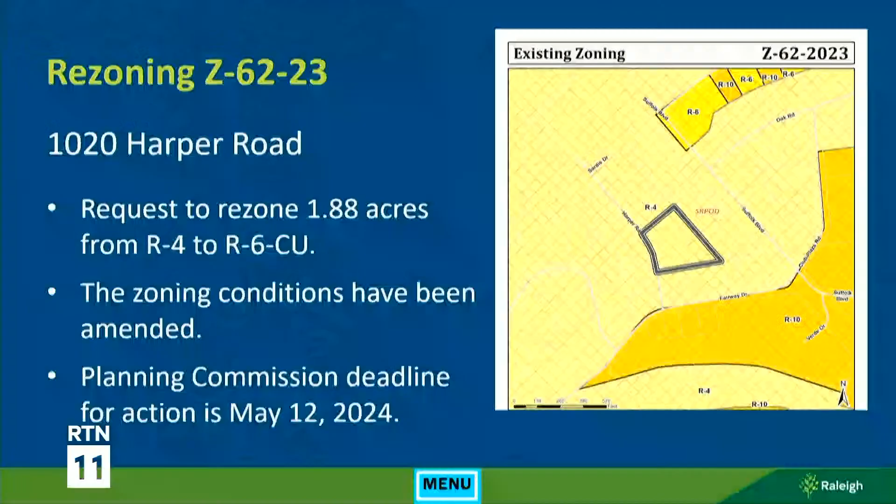So I can outline what those changes are. They include an amendment to Condition 1 to reduce the maximum number of principal dwelling units from 18 to 16, and the addition of 2 new zoning conditions. One pertains to parking, requiring at least 2 on-site parking spaces per principal dwelling unit on the site. The third pertains to side lot setbacks, naming properties on the northwest and southeast side that principal dwelling units would be set back at least 10 feet from. So those changes affect the maximum units and the setbacks that would apply to the site.

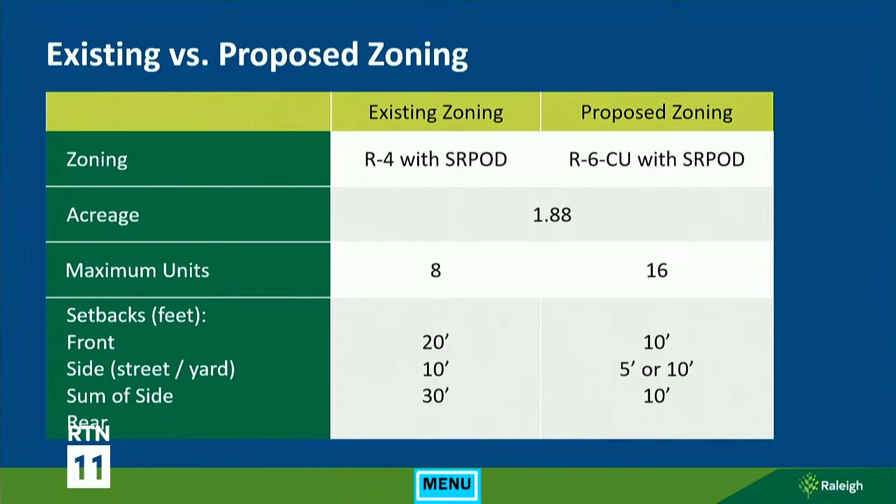And then just as a reminder, this request is consistent with the future land use map, consistent overall with the comprehensive plan, and that includes this list of policies. There were no inconsistent policies that were identified, and your deadline for action does fall before your next regularly scheduled meeting.

So you need to either take action on this case today or request an extension of review. Thank you very much. We have already received public comment on this case, but just so I can get a sense by show of hands, is there anyone today who wishes to speak on any of the proposed changes or any other aspects of this case? And seeing none, we can bring it back to the table for comments from the commission.

Any additional thoughts from our commissioners? And seeing none, I'd like to entertain a motion.

Vice Chair Raines. Thanks, Chair Miller. So for zoning case Z6223, I move to recommend adoption of the proposed consistency statement dated April 23rd, 2024, contained in the agenda materials, and to recommend approval of the zoning amendment.

Thank you. We have a motion. Do we have a second? Second. Commissioner Fox has seconded. Any further discussion or debate? By show of hands, all those in favor? Any opposed? That motion passes 6-1.

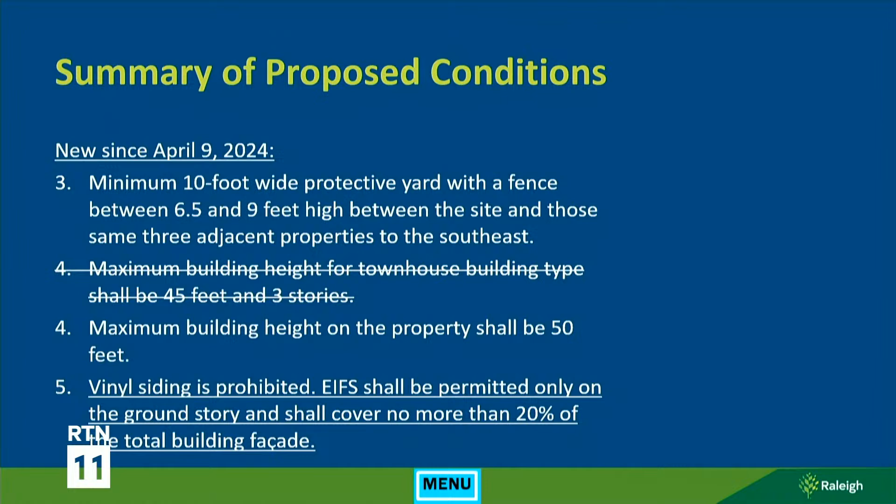And the condition that limits building height on the overall property to 50 feet remains unchanged as well. The request is consistent with the comprehensive plan and the future land use map and the urban form map, and it's consistent with policies related to future land use, conditional districts, compact development, transit access, and buffering.

Your deadline for action is June 8th, and there are no outstanding issues. Please let me know if I can answer any questions.

Thank you. We've already received public comment on this case, but so I can get a sense by show of hands, is there anyone here who wishes to speak on any of the proposed changes or any other aspect of this case not previously discussed? I believe I see one. Anyone else? Okay, all right.

Commissioner Miller, members of the commission, Toby Coleman with Smith Anderson here on behalf of the applicant. Just wanted to say we are available for questions if you all have any questions about the revised conditions. Thank you very much.

Seeing no other interest in public comment, we'll bring it back to the table for additional discussions, and I'll thank the applicant for making the long list of changes that we discussed at our last meeting. Any other comments from the commissioners? Commissioner Haver: I agree, I'd like to thank the applicant for making the changes and listening to some of the concerns of the Planning Commission. I'm comfortable and I'm ready to move forward with a recommendation for approval if there's no other concerns with the commission.

Seeing no interest in further comment, I'll entertain a motion. I move to recommend adoption of the proposed consistency statement dated April 23rd, 2024, contained in the agenda materials, and to recommend approval of zoning amendment Z0124. Thank you. Do we have a second?

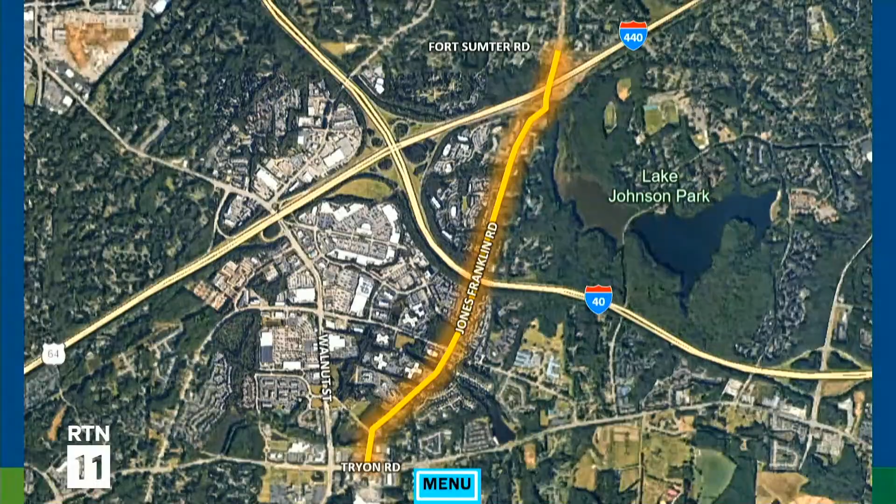Here is a look at the segment of Jones Franklin Road that's included in the request, again, between Fort Sumter Road and Tryon Road. Here's what the change to the street plan map would look like. Existing, you have the 6-lane divided avenue. It would be modified to the 4-lane divided avenue.

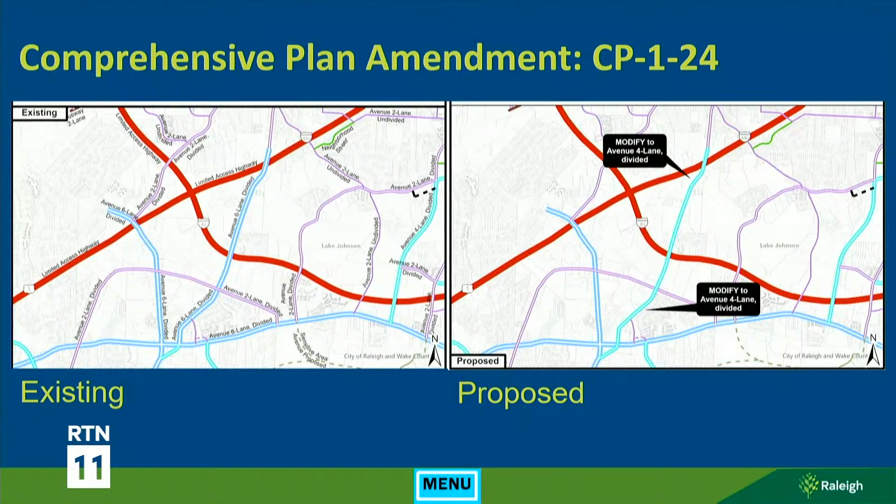And then here's an overview in the change in the design of the road. So you can see the biggest thing that's changing is the width of the right-of-way and the width of the pavement of the road itself. Things like bike lane, sidewalks, street trees, all of those are required for both of the cross-sections. Biggest thing changing here would be the width and the amount of pavement going down.

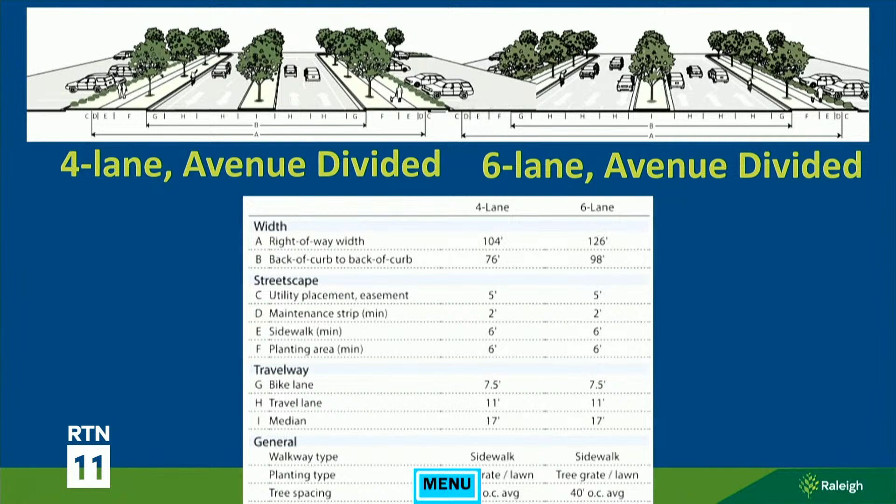The request is consistent with several policies in the comprehensive plan and not inconsistent with any policies. And there are no remaining outstanding issues. Again, your deadline for action is July 22nd. I'm happy to answer any questions you have for staff. Again, this is a city-initiated request, so we have transportation staff here as well, but there won't be a separate applicant presentation. Thank you very much.

I believe we open for public comment. Is there anyone in favor of this in the public who would like to speak? If so, you have a total of 10 minutes. Thank you, yes, please come to the podium and introduce yourself.

Hi, my name is Khaled Al-Zubi from IC Engineering, and I am with my client. Here we have a property on 2308 Jones Franklin Road.

I have a few questions. First, what is your timeline? I know it used to be 6 lanes with NCDOT. What is your timeline for this widening or change? Second, how are you going to work with Town of Cary and NCDOT, and how is that affecting the Dillard Drive improvement of Jones Franklin Road and Dillard Drive? Would you please give us more information so we can prepare our site plan for 2308, which is under the jurisdiction of Town of Cary, but we are looking into amending it to City of Raleigh if that's possible.

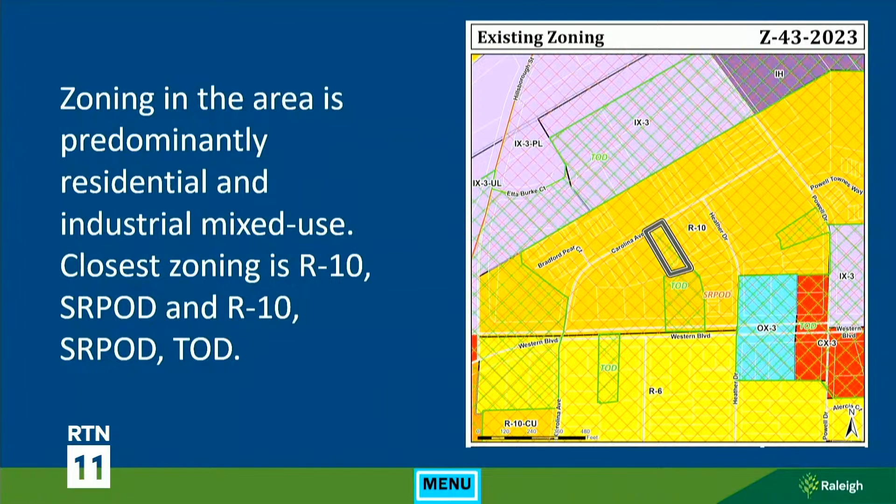Commissioner Bennett. Don't sit down yet. Could you bring up the map again that shows the TOD, please? The TOD is the green there, I know it's a little hard to see. So it seems odd that it's just those select parcels anyway. I'm trying to understand why those have the TOD on them.

Yeah, so there were a few criteria that were used to apply the TOD along the southern corridor and the western corridor. One of them, which I think was the case here, is any R10 zoning district that's developed with multifamily housing. At the time the TOD was applied, there was a three-unit multifamily development there, so I believe that's why it was applied. Since then it was recombined, so it looks like it is just half on the single family parcel now. Okay, thank you.

Other thoughts from the commissioners? Yes, Commissioner Fox.

Generally, I would not be supportive of removing the overlay, and hearing that it does not preclude what the plans are, that reinforces my position. However, had the applicant come forward during the application of the TOD and requested removal, it likely would have been granted. So in that sense, although I'd like to support transit and the TOD overlay, I am supportive of this individual request. Thank you. Commissioner Haver.

I agree with Commissioner Fox. Typically, I know this commission doesn't want to remove the TOD, but I think in this case, looking at how it was mapped and what the criteria was, what was there previously, and looking at the development pattern along this area, I would be in favor of this application.

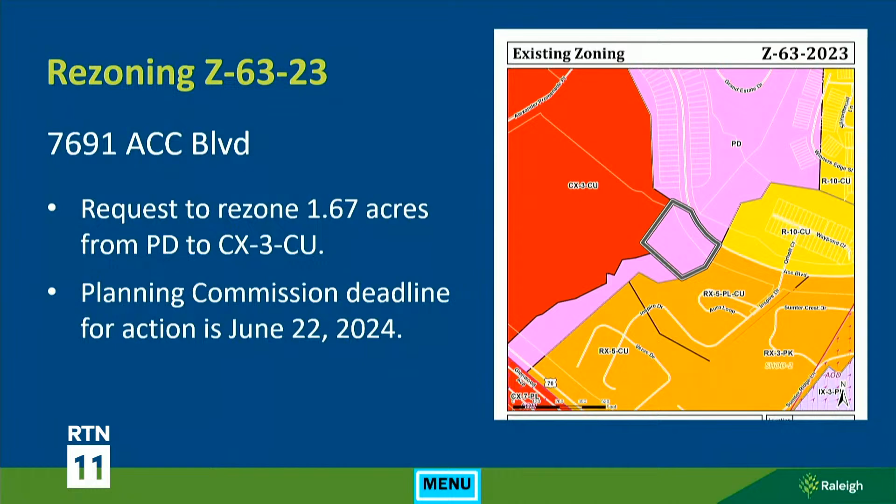Good morning. So this is case Z6323 at 7691 ACC Boulevard. It is a request to rezone from a planned development district, the Alexander Place PD, to commercial mixed use, 3 stories, conditional use. So the zoning in this area is a mix of mixed use districts, residential districts, and then the planned development that this parcel is a part of.

This is in northwest Raleigh, near the intersection of Brier Creek Parkway and Glenwood Ave, and the sort of commercial center in that area. There's also a mix of residential uses, apartments and townhomes that exist in this area, and then farther down ACC Boulevard to the east are heavier commercial and light industrial uses.

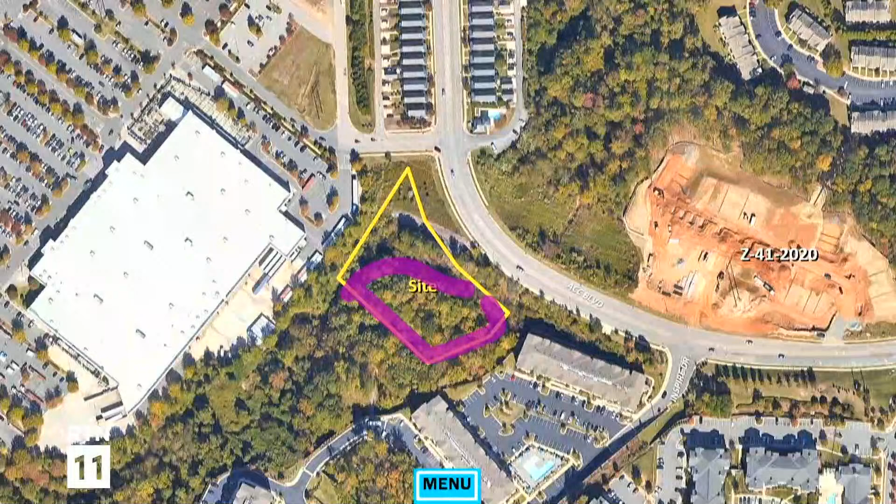There is one proposed zoning condition which would prohibit cemeteries. And then the change in entitlement here, in the PD, this site is kind of in a subsection all of its own, and so the entitlement is really only office use, specifically up to 20,250 square feet of office use.

Switching to commercial mixed use, that would widen the range of land uses that would be possible on the site to include residential, a little bit more office use than currently permitted, and then other commercial uses like retail.

The request would add housing, residential as a land use, so that does add to the housing supply. There are no requirements for those to be made affordable, but there would be a variety of housing types, smaller units, smaller lots, and is within walking distance of a transit stop.

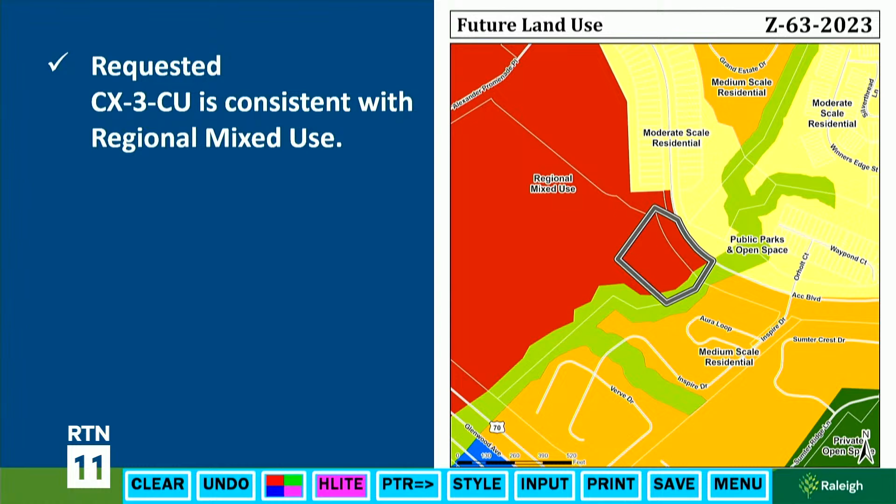The site is within a city growth center, which recommends urban or hybrid frontages, but also acknowledges that parcels with site constraints might need to pursue an alternative approach. There's no frontage included in this request, but the floodplain and the slopes do push development closer to the street in a way that would make a significantly suburban urban form difficult on the site, and would also make meeting most frontage requirements difficult.

Request is consistent overall with the comprehensive plan. That includes policies really touching on the mix of uses that are allowed and the compatibility with the surrounding area.

Inconsistent policies: the site is located in an area with existing fire service concerns, so current standards for fire response can't be met, so that's noted in this policy. It is an existing issue, and the increase in entitlement is rather small in the grand scheme of things, but wanted to point that out.

And then your deadline for action is June 22nd. Let me know if I can answer questions.

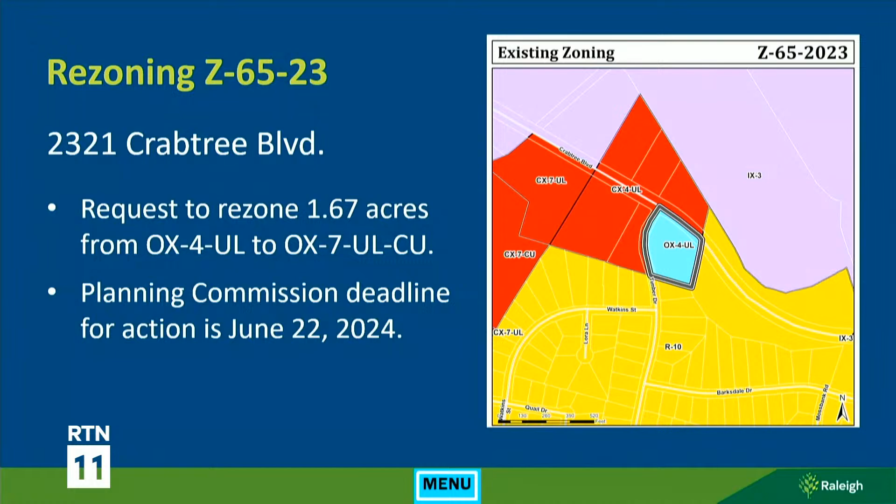Thank you. Yes, so this is rezoning Z6523, requests to rezone about 1.67 acres at 2321 Crabtree Boulevard from office mixed use 4 stories, urban limited frontage, to office mixed use 7 stories, urban limited frontage with conditions. Your deadline for action is June 22nd.

So zoning in the area is predominantly mixed use. This site is located off of Crabtree Boulevard, about 1/4 mile east of Capitol Boulevard. That's why you see that mix of industrial mixed use and commercial mixed use that is really characteristic of that area along Capitol Boulevard. I'll point out too that there is a large area of R10 zoning just to the south.

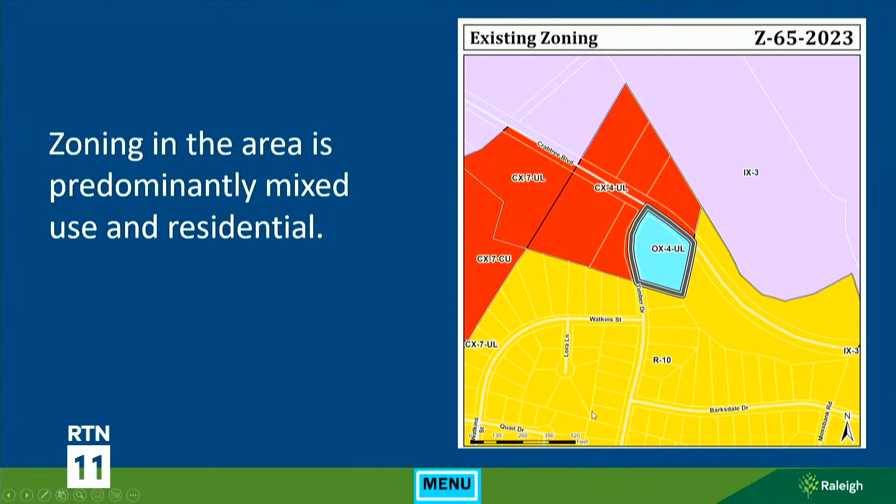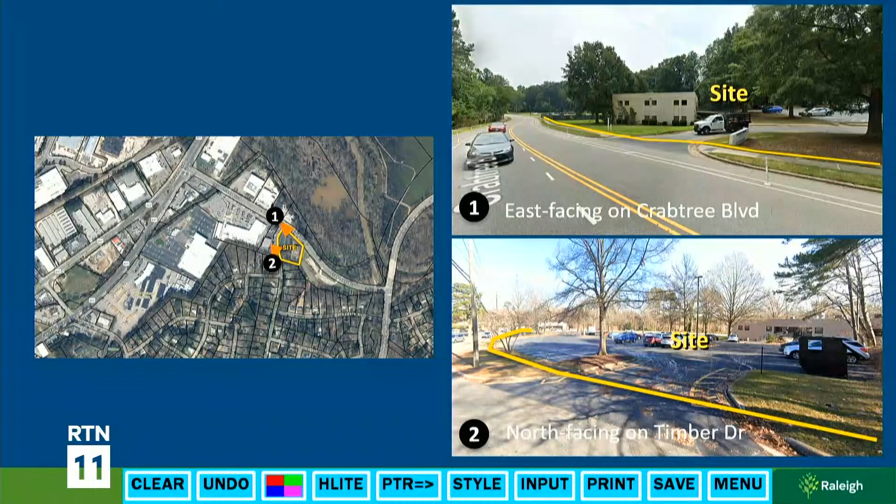The applicant has proposed one zoning condition prohibiting cemeteries as a use.

So the request doesn't include any subsidized units, but it does include allowing for more units, smaller units, and a wide variety of housing types within walking distance of existing transit and planned future frequent transit service. This area is a less diverse and wealthier area of Raleigh compared to the average, and rents have been increasing very quickly since 2016 — 57% versus the citywide average of 25%.

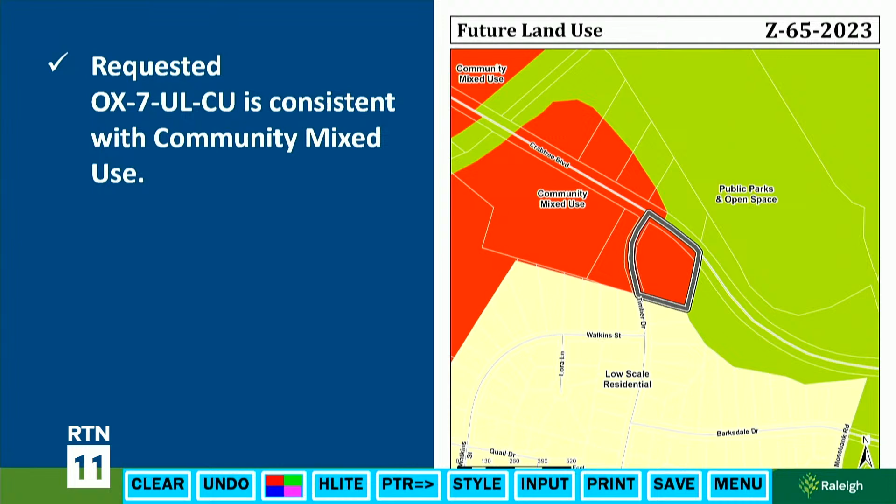The requested zoning district is consistent with the community mixed-use future land use designation. There's a lot of urban form guidance for this site with the proximity to the future bus rapid transit on Capitol Boulevard. So we have city growth center, frequent transit area, bus rapid transit area, has a little bit of transit station area, and then an urban thoroughfare designation for Crabtree Boulevard.

The request includes an urban limited frontage. This frontage is consistent with all of this guidance from the urban form map. It would require that the building is located closer to the street frontages, and no parking would be allowed between the building and the street frontages, and then it would require pedestrian entrances facing the street frontages — really pulling the building closer to the street and creating a more walkable, pedestrian-friendly environment.

The request is consistent with the future land use map, consistent with the urban form map, and consistent with the comprehensive plan overall. It's consistent with several policies in the comprehensive plan, a lot of them having to do with allowing for compact development, increasing housing entitlement close to these areas planned for future frequent transit service, and then, of course, allowing for mixed use, reducing vehicle miles traveled.

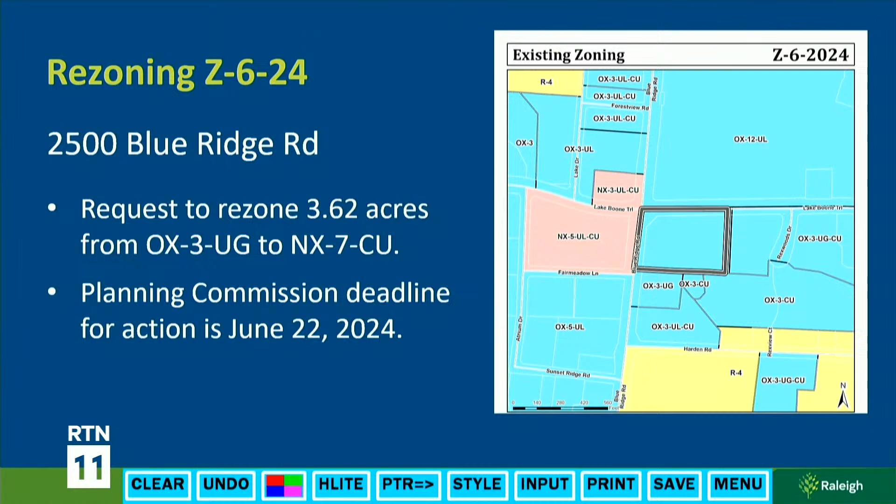Good morning, Commission. Robert Tate, Planning and Development. This is rezoning request Z624, at 2500 Blue Ridge Road. It's a request to rezone approximately 3.6 acres from OX3 UG to NX7 conditional use. Your deadline for action is June 22nd. Zoning in this area is predominantly mixed use, with some office mixed use and neighborhood mixed use.

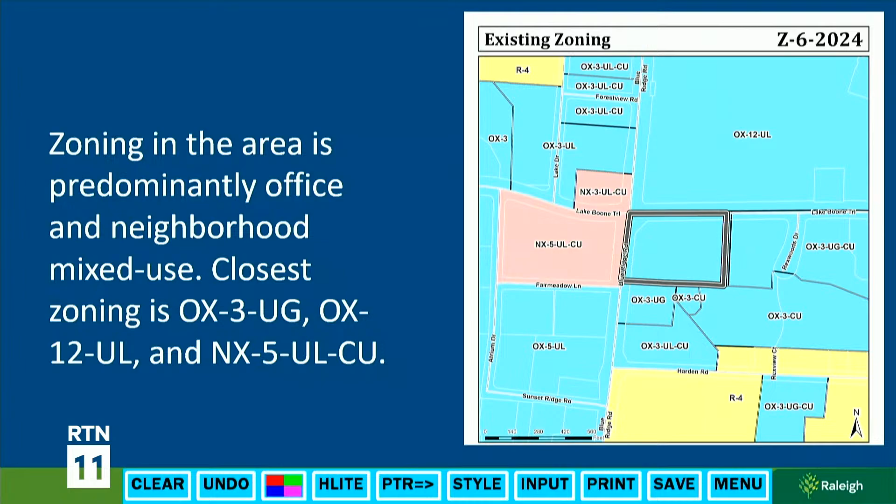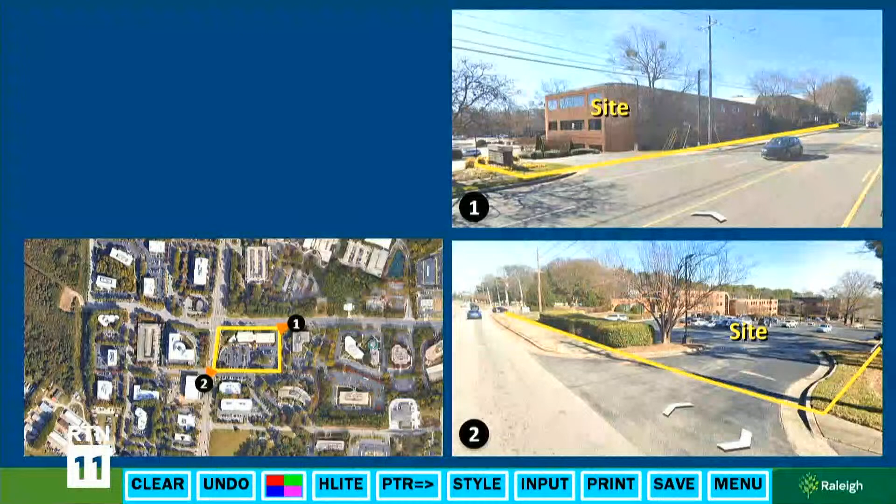Here's a closer look at the site. You can see that the site is currently developed - it is a medical office building built in 1982.

Here are a couple of ground images of the site, and a few more. Looking at the southeast corner of the intersection, from the rear of the site looking north, you can see the associated parking. Looking east from Blue Ridge Road at the site, you can clearly see the overhead major utility easement, and the last image is looking south from Lake Boone Trail.

So there are various proposed conditions the applicant has proposed. First being a prohibition on various land uses, a few to point out: vehicle fuel sales, vehicle services, vehicle sales and rental, shopping center, check cashing, and payday loan facilities, just to name a few. Also, the second condition would not permit drive-through or drive-in facilities. The third would limit residential entitlement to not exceed 260 units, and also limit commercial uses to not exceed 5,000 square feet.

The fourth condition proposes a build-to on Lake Boone Trail and also on Blue Ridge Road. The fifth condition would require retail sales to be located within or attached to a mixed-use building.

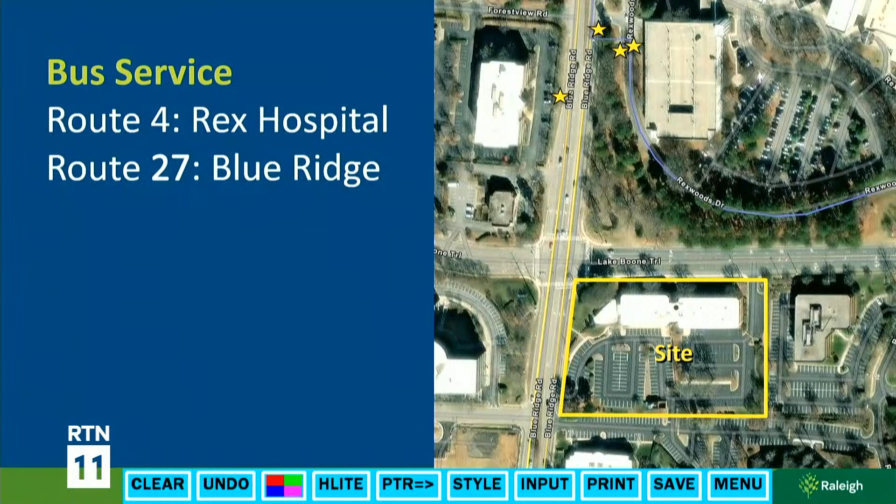This request would add to the housing supply and includes subsidized units, those 5 affordable rental units that the condition proposes. This would keep the variety of housing types currently allowed, and also keep the smaller units that would already be allowed, and is within walking distance of transit.

This census tract has less people of color than the citywide average, and also has less low-income households than the citywide average, and rents appear to be increasing at the same rate as the city as well.

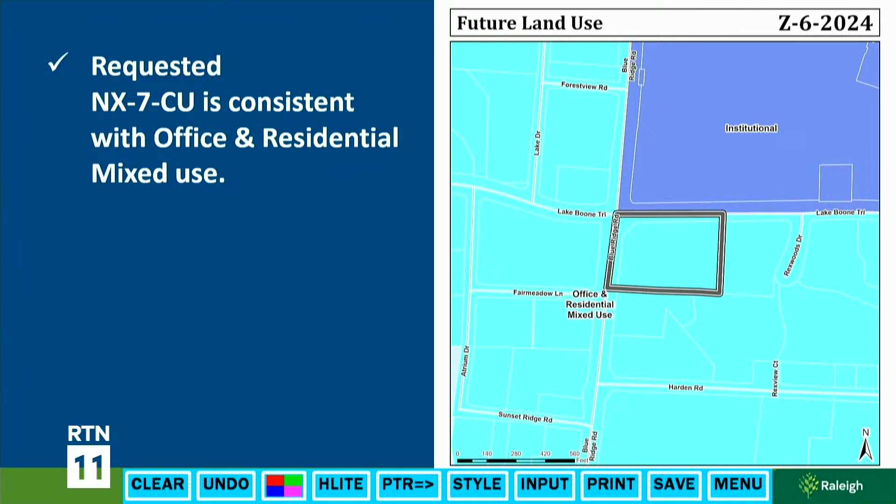This request is consistent with the future land use map designation of office and residential mixed use. However, a zoning frontage is not proposed with this request, so it's inconsistent with the urban form map. There was a build-to proposed by the applicant, but without addressing pedestrian access and location and size of parking, this request was deemed inconsistent with the urban form map.

Overall, this is consistent with the comprehensive plan and future land use map, and inconsistent with the urban form map. Here is a list of consistent policies, and then those two inconsistent policies from the Blue Ridge Arena corridor, largely addressing buffering, pedestrian access, and the size and location of surface parking.

So there are no outstanding issues, and your deadline for action is June 22nd. Here for any questions. Thank you.

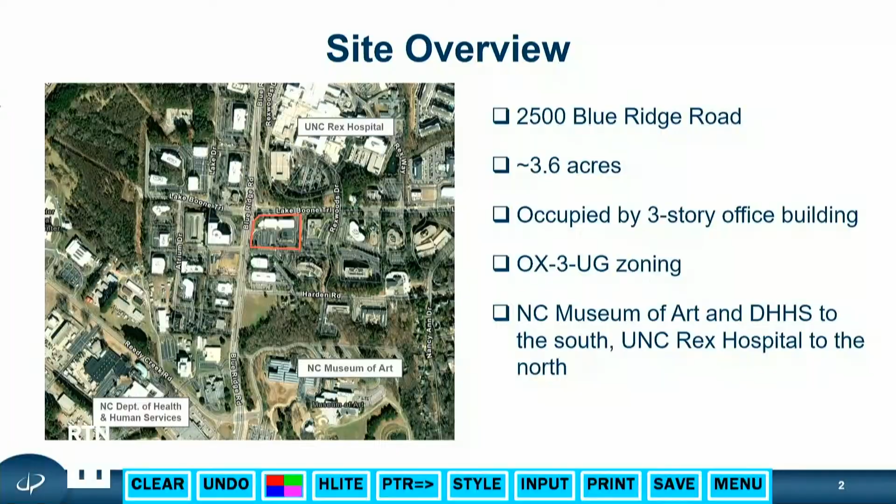It's occupied by an aging 3-story office building built in 1982, long owned by Highwoods, and like many office owners are recognizing, the changing position of office in our marketplace, the growing need for housing, and the need to reposition this for multifamily with also a potential mixed-use component.

As I mentioned, the Museum of Art is to the south, DHHS is further to the south, but UNC Rex Hospital is directly to the north. There are major transit stops within several hundred feet to the north because it's an existing employment center and intentionally an area where you want to bring housing.

This is also one of the last privately held properties along the Blue Ridge corridor, so trying to visualize all of those policies and bring them forth, this is one of those opportunities where that can happen.

But we do have some significant site constraints, mainly on Blue Ridge Road. This 100-foot power line easement is a high-voltage power line by Duke Energy with prohibitions where you cannot put buildings underneath the power line. So while there is some guidance Robert discussed about the frontage and having a frontage designation, it simply isn't possible here because we're not able to place a building anywhere in that blue zone.

What you see, the existing office building, is really kind of the configuration that's possible today. Nevertheless, we have added meaningful conditions to make sure that we address that. There is also about 35 feet of fall from Blue Ridge Road down to Lake Boone Trail, which lends itself to some of our requests in height.

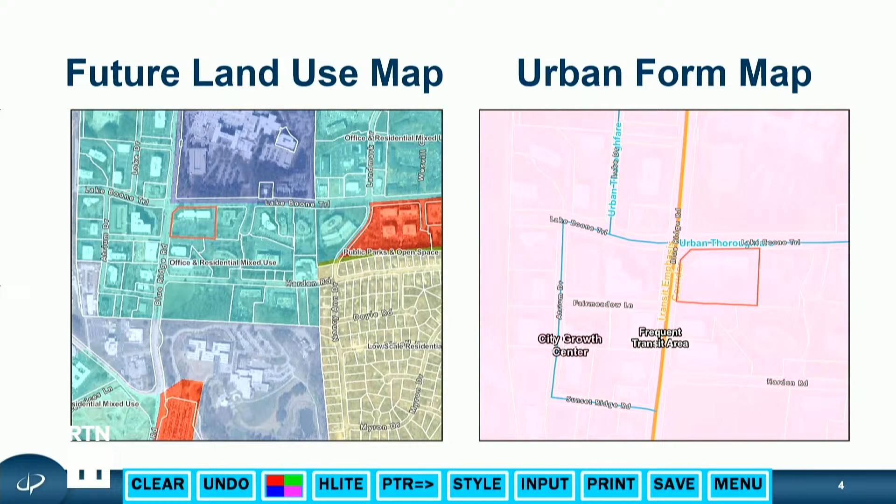Lake Boone is an urban thoroughfare. The site is also within the Health and Wellness District of the Arena Blue Ridge Area Plan, which encourages mixed-use development intensities along this corridor.

So there's direct guidance there, and it's mentioned in your staff report, of the policy to have that mixed use and bringing residential. I will also note there are no apartments along the corridor on Blue Ridge between 440 and Edwards Mill Road.

And the most recent apartments in this area were around 2012. So it's been a long time coming for bringing more residential uses to this area.

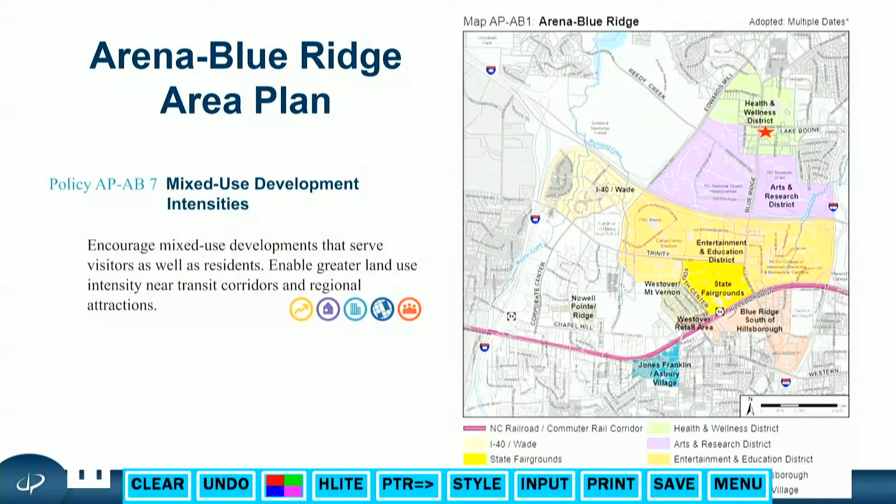So what we've done is tried to bring this rezoning request to follow the Arena guidance and bring that vibrancy to the corridor by adding the NX designation, 7 stories, and conditions to bring us further in line with the future land use map, as well as the policy guidance for this health and wellness district and the office and mixed use.

So the conditions include prohibited uses such as shopping centers and a lot of things that we see that are less desirable along a corridor.

We've also added no standalone commercial retail, as well as a custom build to limits on the units, for 260 units and 5,000 square foot of commercial maximums, to bring this again closer in line to the scale that's desired by the future land use map.

And we've also added 5 units of workforce housing at 80% for 10 years. We recognize that this commission has requested applicants to look into that, and we proactively added that to this case in direct response.

These are the zoning conditions in fuller form. I think the ones worth mentioning in terms of consistency are, in addition to limiting the residential units and commercial units, we've tried to bring that no standalone retail.

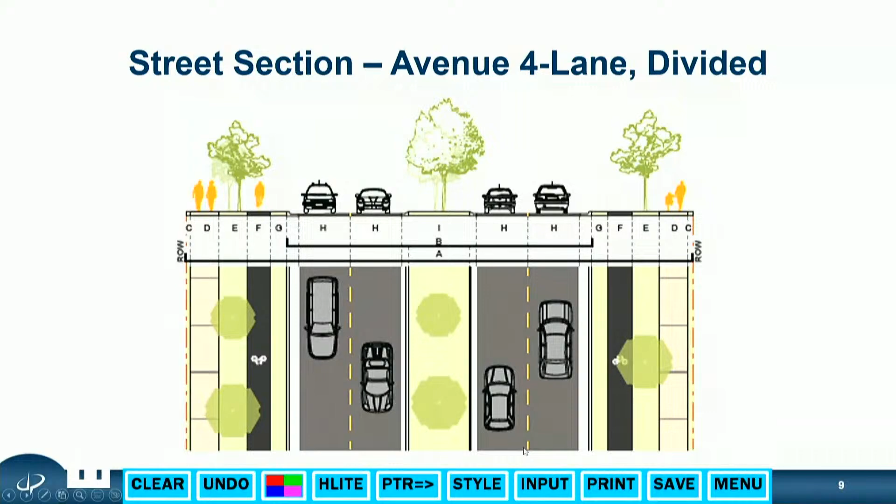So, theoretically with the street trees providing that buffering. And because this would be the likely primary street, we will have pedestrian entrances because the building's going to be oriented in that direction. So I think those are all likely to happen as a matter of course as we design the building, because you're not going to have pedestrian entrances coming this other way.

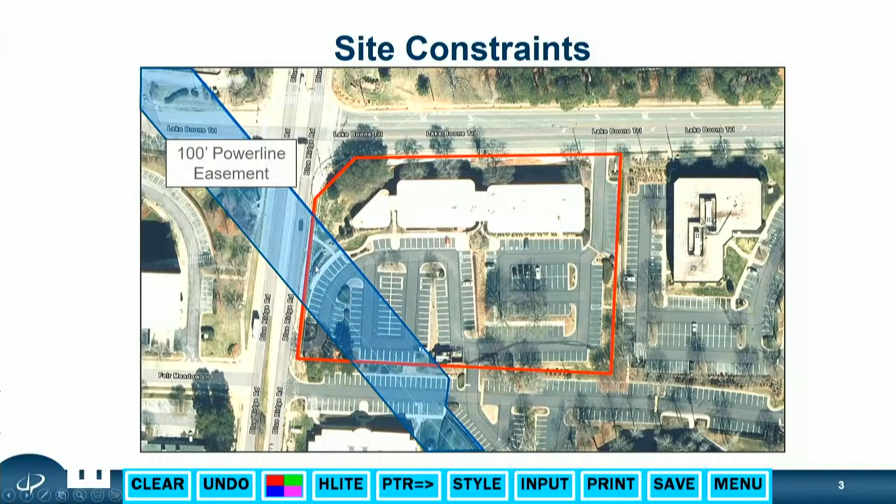I still think it's important to have a pedestrian entrance in the conditions, facing Blue Ridge Road. I think the 15% build-to that would be required along Blue Ridge Road could accommodate a pedestrian entrance. That's where the primary transit's going to be, and we don't want to force residents to come through the parking lot to walk out to the street.

I think that's something we can entertain. I'd like to be able to move this case forward today if possible, because agendas are really getting jammed up at council. So if you could get a condition for a pedestrian-facing entrance on Lake Boone and continue to work on Blue Ridge, I would be happy to move this along.

Yes, Commissioner Bennett. Thank you. I support what's been said so far, and I also appreciate the inclusion of the 5 units of workforce housing. I know the language is what we typically see in the conditions, but I'd love to see the units and not the dedication to the fund, particularly in this area in District E, which is where I live, which is not known for affordable housing. This is such a prime location, with access to healthcare, arts and shopping, so it would be nice to see those 5 units on site. But again, I recognize this is the accepted language of the conditions. It seems to be the way all conditions about affordable housing are worded, so I just wanted to make that comment, but I do appreciate the consideration for those 5 units. Thanks.